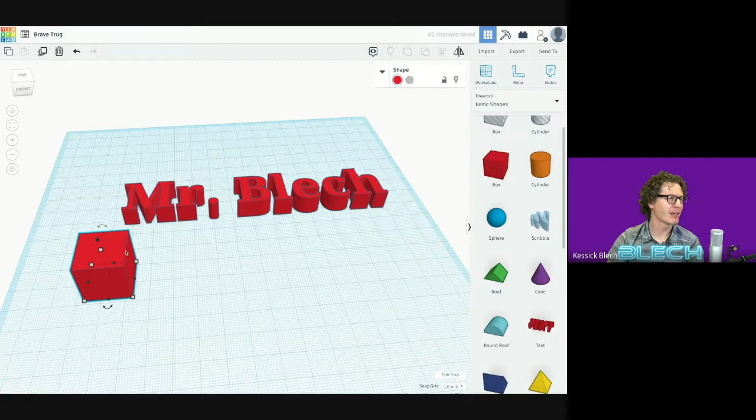Let's start that over again. I'm grabbing my red cube and taking it out and putting it out here on my grid. I'm rotating around, there it is. It is a nice plain cube, right?

There's my white square, and it gives me the dimensions. So these dimensions, it says 20 by 20, right? Those are millimeters.

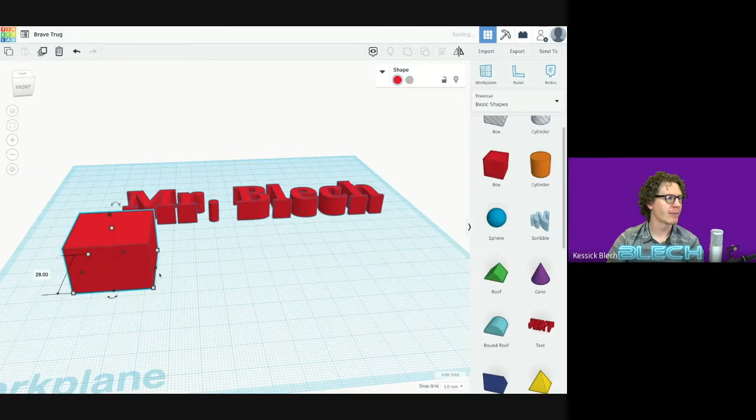So that's 20 millimeters by 20 millimeters, if you're wondering. All right, so you can grab the different squares to do different things. I am adjusting this to be more like a rectangle by grabbing the black square on the right side. So now this looks more like a keychain, right? It's a very, very thick keychain, which I probably don't want, but it is more of a keychain shape.

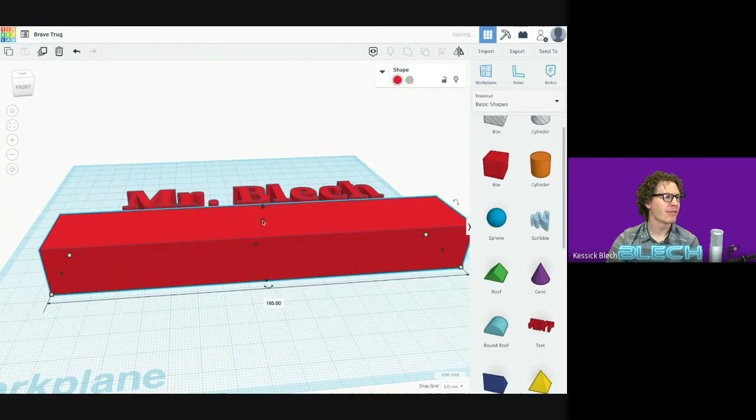So now if I grab the square that is on the top of my rectangular cube, I can shrink it down. So you can see my keychain is now becoming a flat piece of plastic, because we are printing in plastic. That's what it is.

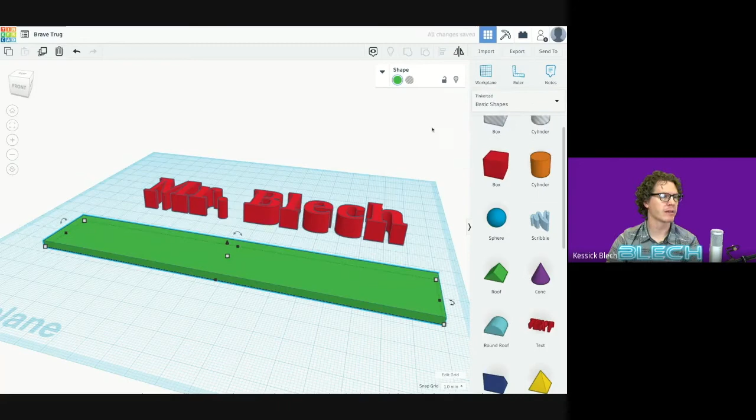And if we want to change the color, that is totally fine. I'm just going to click right on the rectangle here, go up to shape. There is a red circle, and now I'm just going to pick whatever color I want. I'm just going to make my keychain green because I like green. And I'm just going to remove my name so I can add that again.

All right, so here's my basis for my keychain. This is the bottom of it. And now I want to put either my nickname or my name or whatever it is I want to put on the top of my keychain.

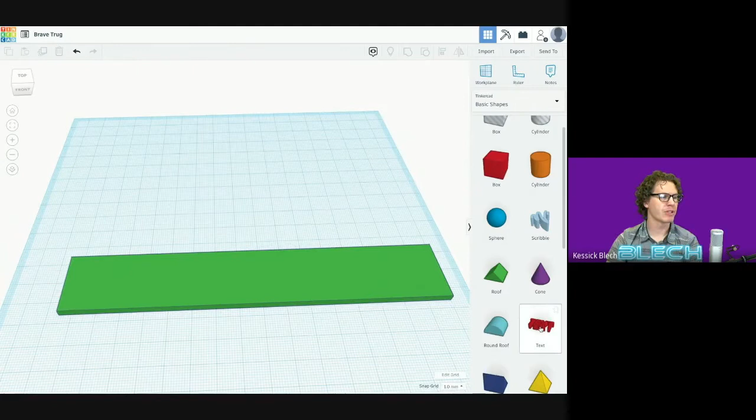So I'm just going to get the text, stick it right on top of my keychain, push this little arrow so I can change the word. What is going to be my nickname? Blechers. Ooh, that's kind of big, right?

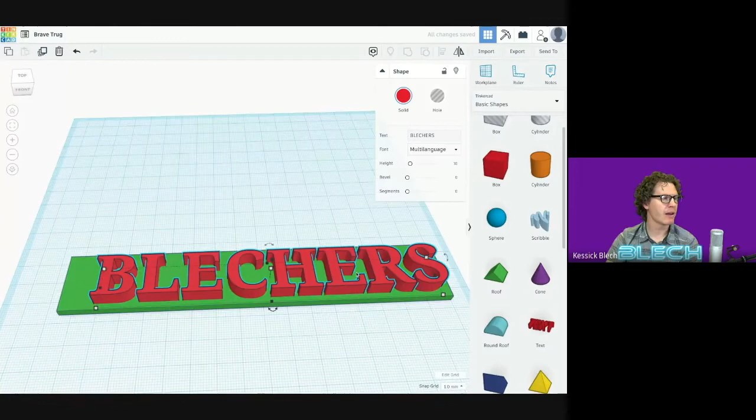So the same thing with this shape. It has the squares around the outside. It has a square on the top. And I can drag those to make it smaller if I want to have a shrunken down name.

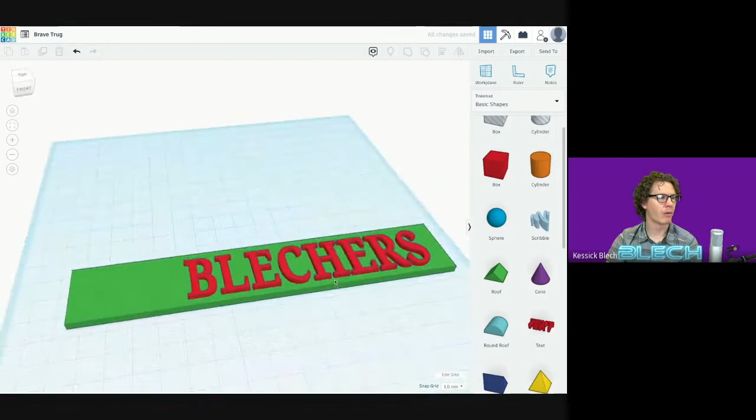All right, and it is kind of tall for a keychain, so I am going to shrink it down this way as well. I don't want my letters getting messed up in my pocket or being knocked off by keys dangling around, so I'm going to make them a little bit shorter, not quite as tall as the base, but I think 1 millimeter shorter is what I did.

So there you go, so I got my name on my keychain. I can change the color of that as well. If you really, really want me to, I can try to do two different colors from the background to your name.

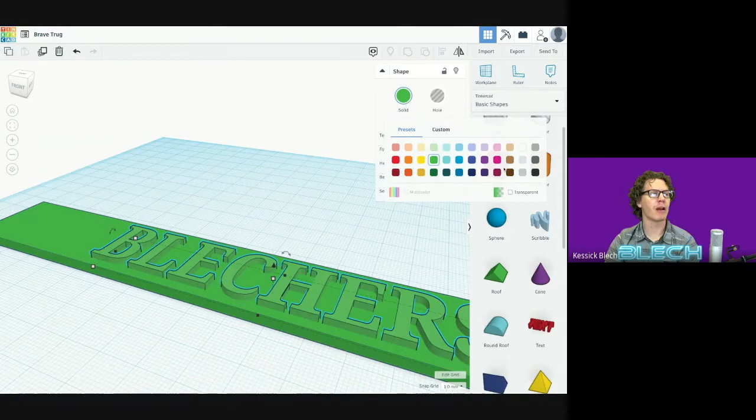It involves me going to the print, pushing pause, changing out the filament, and then putting that back in, and I have to stop it at the exact right time before it starts doing the letters. Because what happens in the printer—hopefully when you watch the video, you saw it prints from the bottom to the top—it does an entire bottom layer, then goes up one more layer, then another layer, and then up.

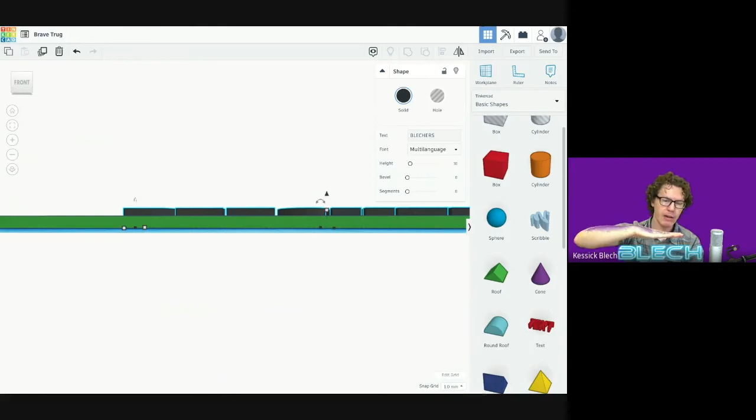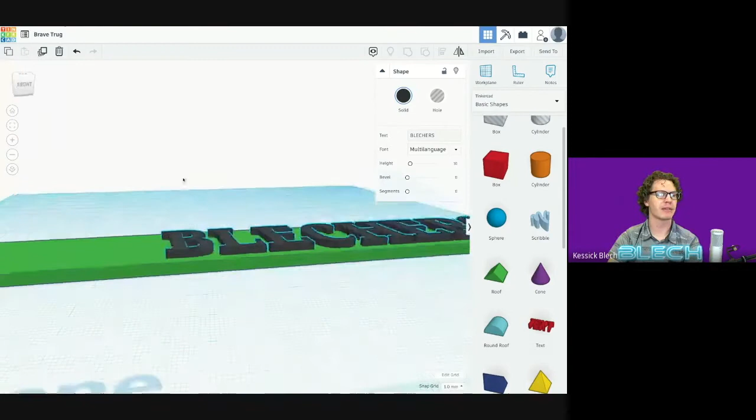And then it starts printing the top layers, so the top layers are last. That means I can change the color if you split your color between bottom and top. If you have colors left and right, I can't do anything about that. Everything has to be one color from the bottom to a certain area, and then the top can be a different color if you really want it to be. So when you're designing your stuff, think about that—the top could be a second color if you want it to be.

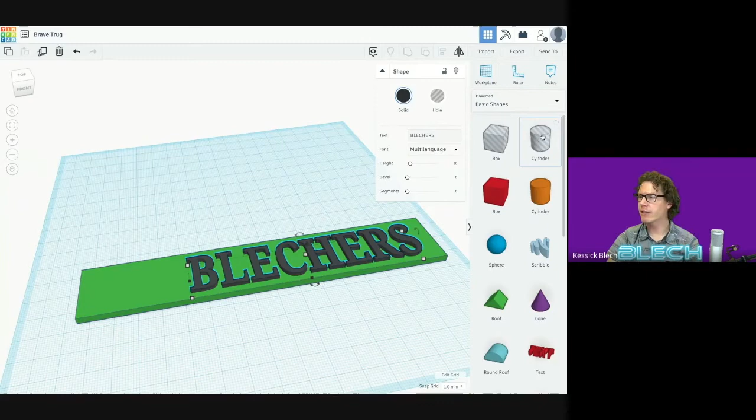All right, the next thing I need to add to my keychain is some place for my key ring to go. So what I'm going to do is check out this cylinder with these stripes on it. Just click on it, drag it out, and whoa.

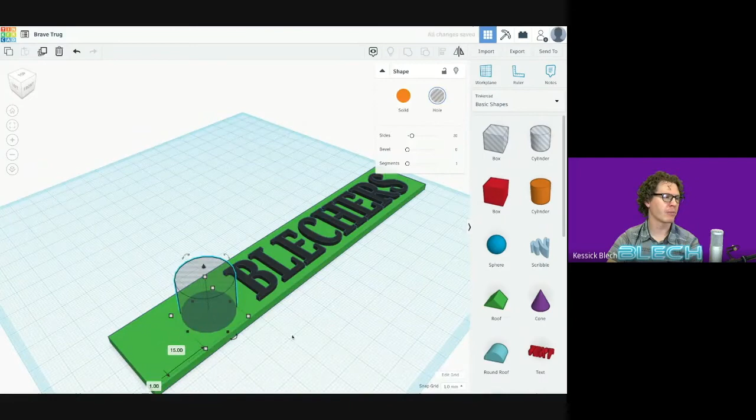Sorry about that, my mouse is freaking out. Drag it on and move it around so it's kind of right there in the middle. I kind of want it closer to the edge. Actually, I'm going to put it closer to my name and then adjust the size of the background of my keychain. So I have put a hole of a cylinder in my keychain.

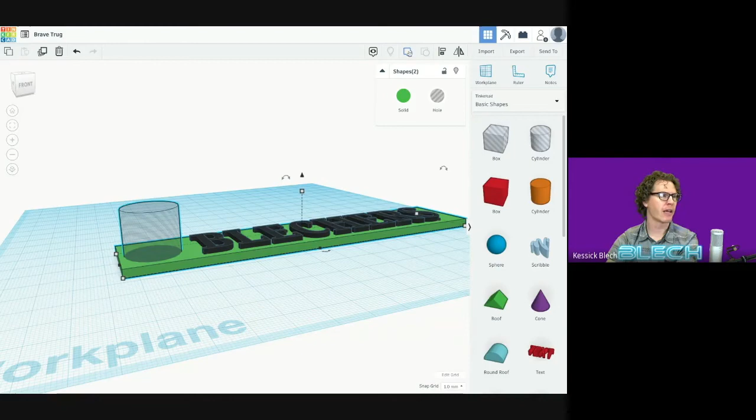So now when I group that green rectangle with my cylinder—I'm just holding shift on my keyboard, I clicked on the cylinder and clicked on the green rectangle, and I choose group—and now it cut a hole in my rectangle. And there's my beautiful keychain with my nickname right on it, Blechers.

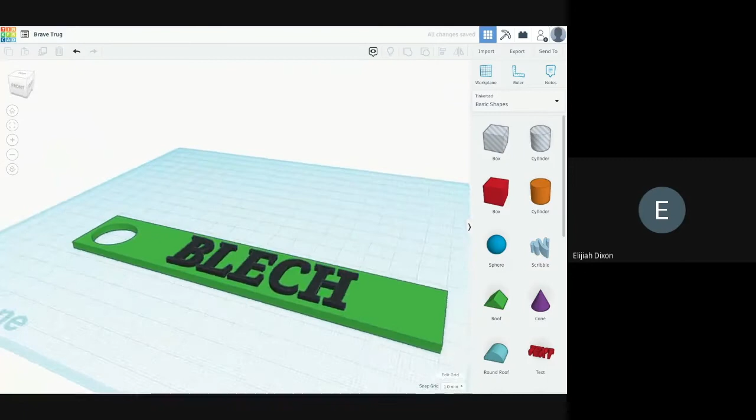Or if I really want to, I can go in and change my name to just Blech. There we go. This seems a lot easier than I thought it would be, right? Not too shabby. Now, that was one choice.

You can make the keychain, and then now you can have your free reign to create anything else you wanted. There are tons and tons of things in here. Rather than basic shapes, you can go in and check out all these other things. They have dinosaur-like bones that you can use and add into your stuff if you want to.

But the first thing you need to do is either create a keychain or the cube.